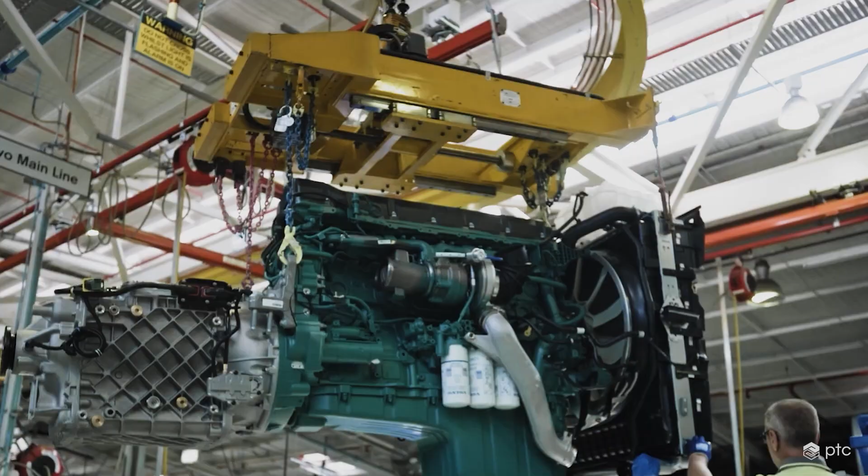The engine is a very complex product, and we want to evolve with the best features, but with as low cost as possible to serve our customers in the best way.

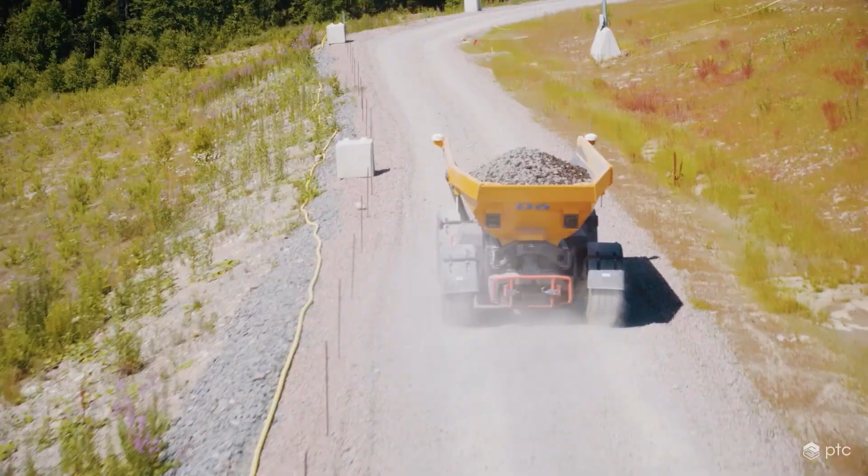Our target is really to create a platform where we have a modular system with components that we can share around the world in a lot of different products. As a base, we have our common architecture and shared technologies, what we call our CAST system. And this is really the foundation of how we think and how we want to build our products.

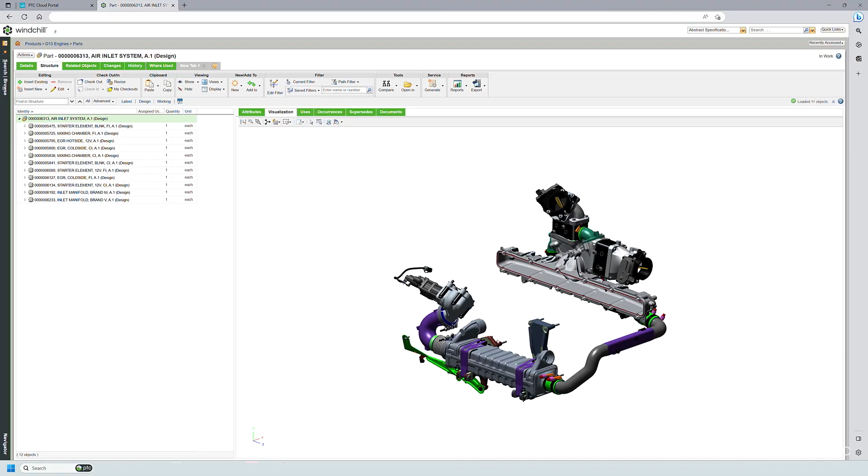And to handle the complexity, we really need efficient PLM tools that can both help us to store the information, but also where we can collaborate together, because we are doing these developments in different parts of the world. And I would say that the collaboration tools, the visualization tools, and the simulation tools are really important.

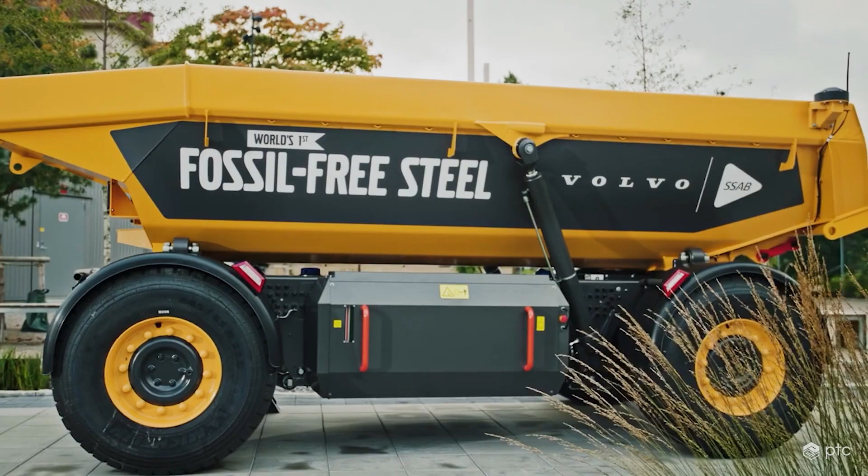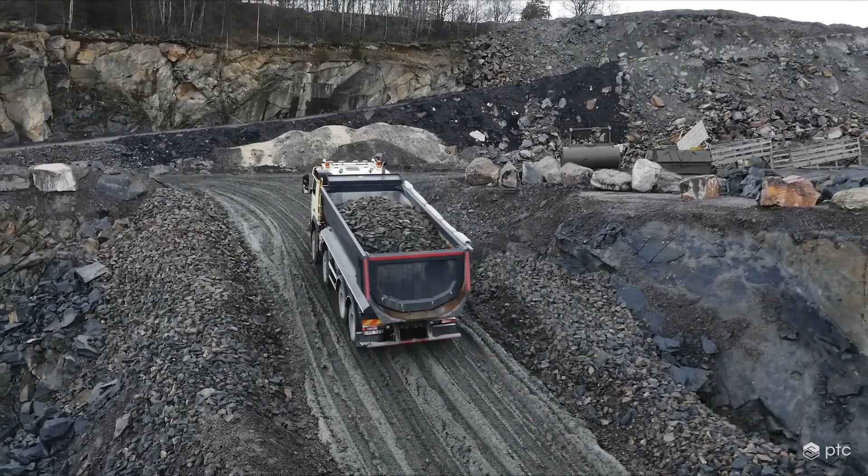We have reduced the amount of complexity by utilizing this methodology, and we have actually seen that even if we have increased the number of products, actually we have reduced the number of parts by a lot.

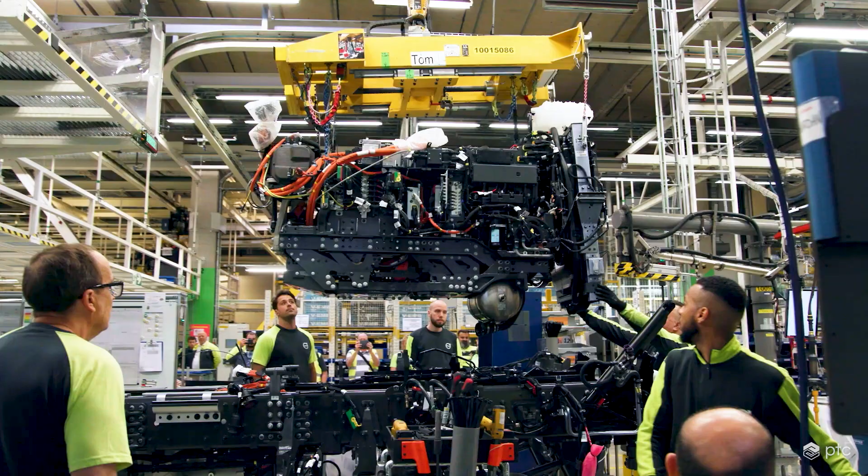We have been collaborating with Volvo for years to ensure we've designed Creo and Windchill and our whole digital thread suite to be excellent tools to support the type of platform strategy that Volvo's using to drive their stellar performance.

Creo and Windchill work together seamlessly to enable an engineering process that allows the customer to say, for example, I want an electrified truck, and I'd like to use that chassis and that electric powertrain and those batteries in that cab, and so on.

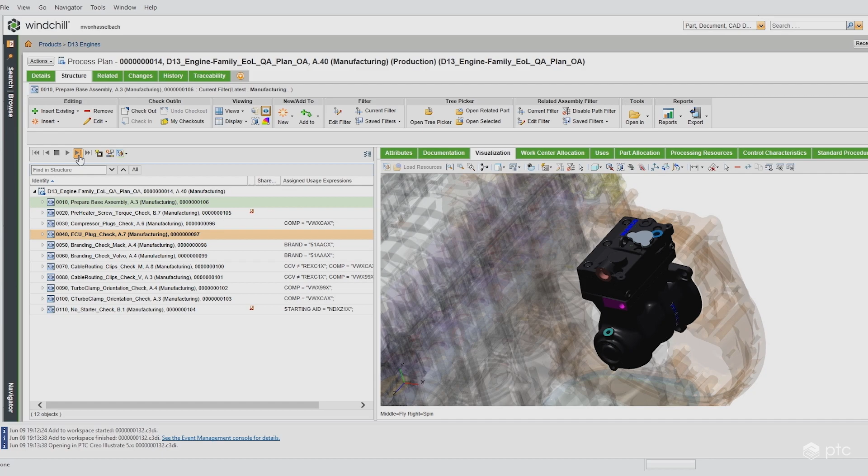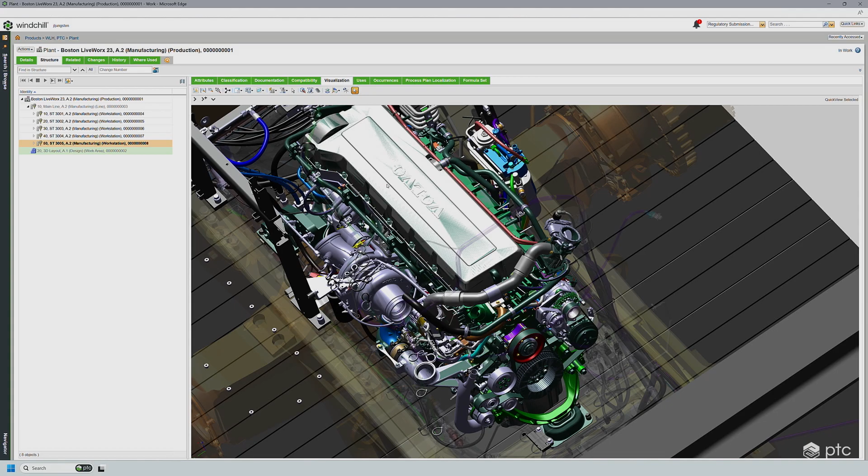Windchill selects the constituent modules, determines how they'll all fit together, and serves up that configuration in Creo. But what's truly possible is that each module of the 3D assembly model carries with it the associated manufacturing and service information. So as we're assembling the unique truck model, Windchill's also assembling the matching model-based manufacturing and service information required to bring that vehicle to life.

This closed-loop, model-based, digital thread platform strategy is so powerful that it represents numerous points of incremental margin to customers who implement it. Volvo, a company with nearly $50 billion of revenue, justified a switch of CAD and PLM to get there.